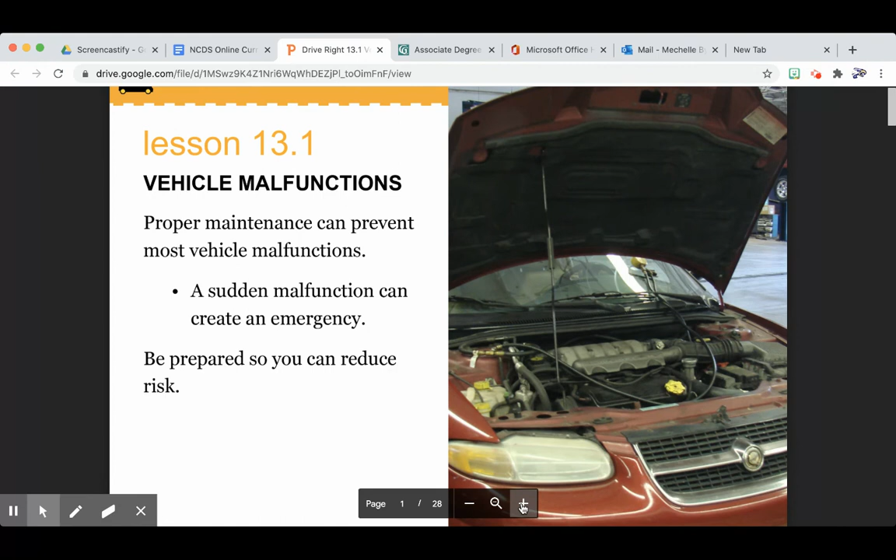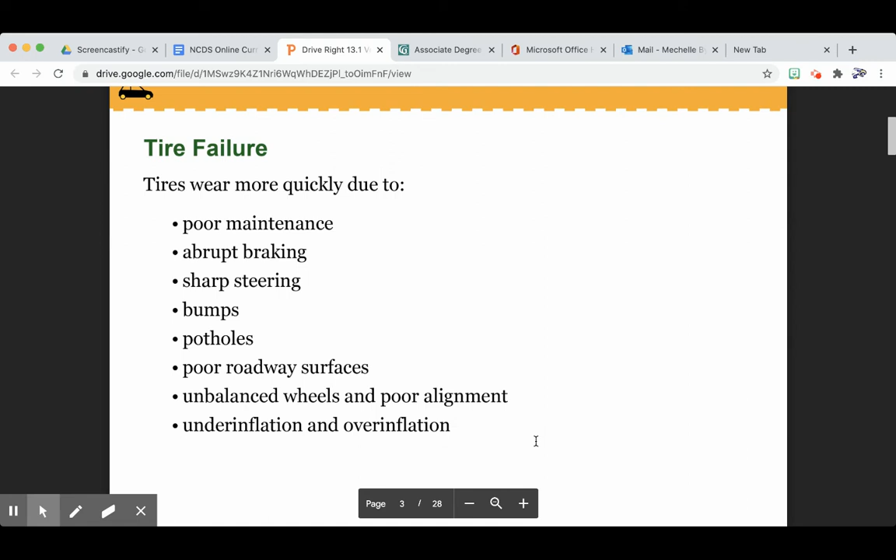List actions to take if a tire fails. Tire failure: tires wear more quickly due to poor maintenance, abrupt braking, sharp steering, bumps, potholes, poor roadway surfaces, unbalanced wheels and poor alignment, underinflation, and overinflation.

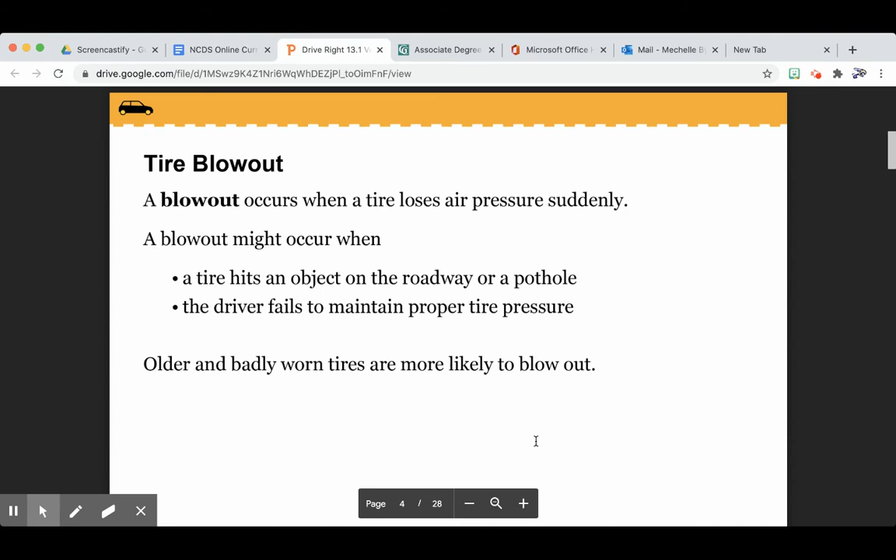A tire blowout occurs when a tire loses air pressure suddenly. A blowout might occur when a tire hits an object on the roadway or a pothole, or the driver fails to maintain proper tire pressure. Older and badly worn tires are more likely to blow out.

When a front tire blows out, the vehicle quickly pulls in the direction of the deflated tire. Steer toward the target and hold firmly against the pull of the vehicle. A left front tire blowout is especially dangerous since the vehicle may pull towards the lane of oncoming traffic. What actions would you take to avoid a car with a blowout that was moving into your path of travel?

Handle a rear tire blowout just as you would a skid. Grip the steering wheel firmly, ease up on the accelerator to slow, do not brake, check the traffic situation as you gain control of the car, drive off the roadway slowly to a safe location to stop, braking gently.

Turn on hazard flashers. Your first instinct is to pop on that brake, mash on that brake as hard as you can, and to overcorrect. You got to remember, try not to do that.

The most dangerous aspect of changing a flat tire is finding a safe place to change it. It is important to know how to change a tire. Where can you find information on how to change a tire on your vehicle?

Replace or repair the flat tire as soon as possible. If your spare tire is a temporary or compact spare, drive on it only as necessary under the manufacturer's conditions for use. Many spare tires are called 50-50 tires, meaning the vehicle should not be driven over 50 miles per hour or more than 50 miles.

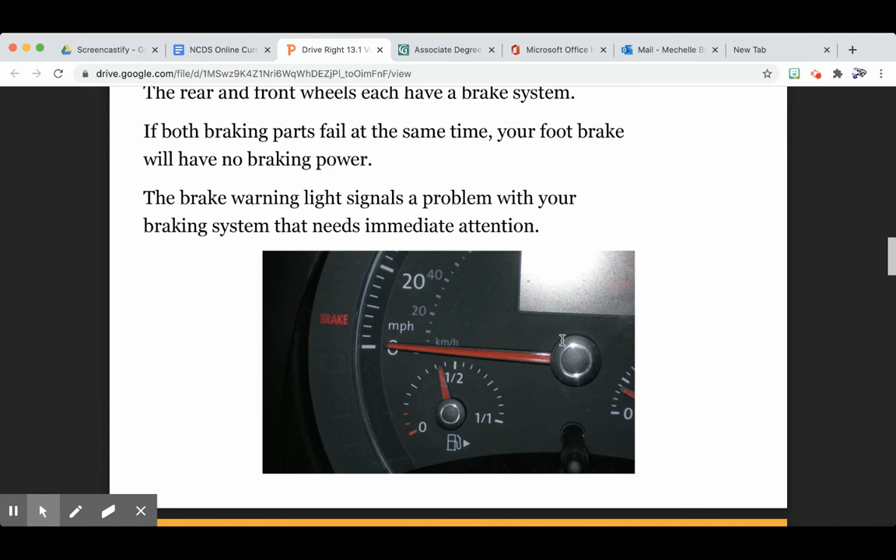The brake warning light signals a problem with your braking system that needs immediate attention. Total brake failure rarely happens, but if it does, it is important that you stay calm.

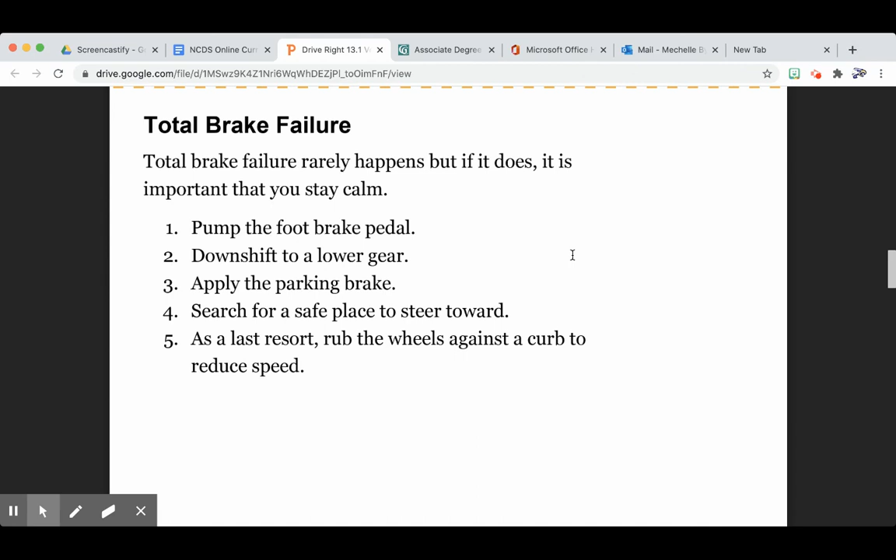Pump the foot brake pedal. Downshift to a lower gear. Apply the parking brake. Search for a safe place to steer toward. And as a last resort, rub the wheels against a curb to reduce speed.

When brakes overheat, they can lose effectiveness. This condition, called brake fade, occurs after continuous hard braking. To regain full braking ability, stop the vehicle and let the brakes cool.

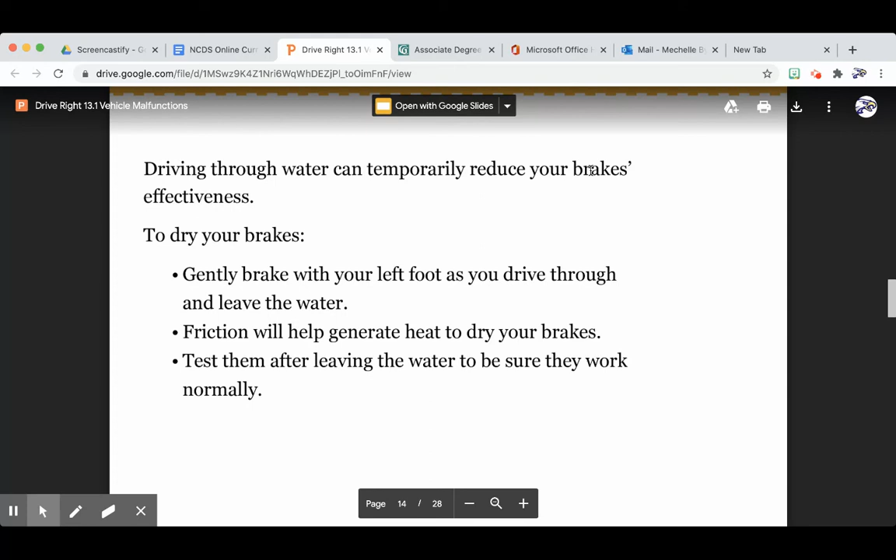Driving through water can temporarily reduce your brakes' effectiveness. To dry your brakes, gently brake with your left foot as you drive through and leave the water. Friction will help generate heat to dry your brakes. Test them after leaving the water to make sure they work normally.

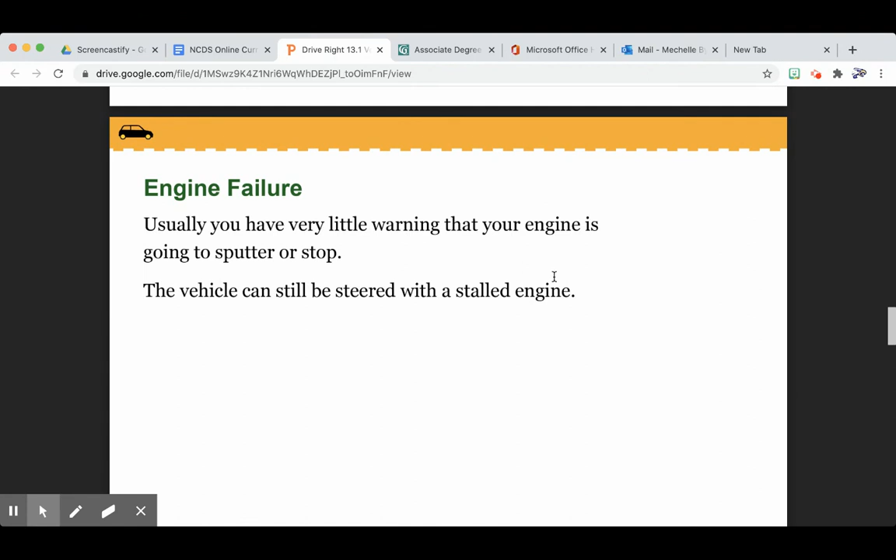Describe what to do in case of engine or steering failure. Usually you have very little warning that your engine is going to sputter or stop. The vehicle can still be steered with a stalled engine.

If your engine stops suddenly, shift to neutral when the engine first sputters or stops. Begin moving out of traffic with your flashers on. Do not brake. Try to restart the engine while you're moving. If the engine starts, shift into a forward gear and proceed to safety.

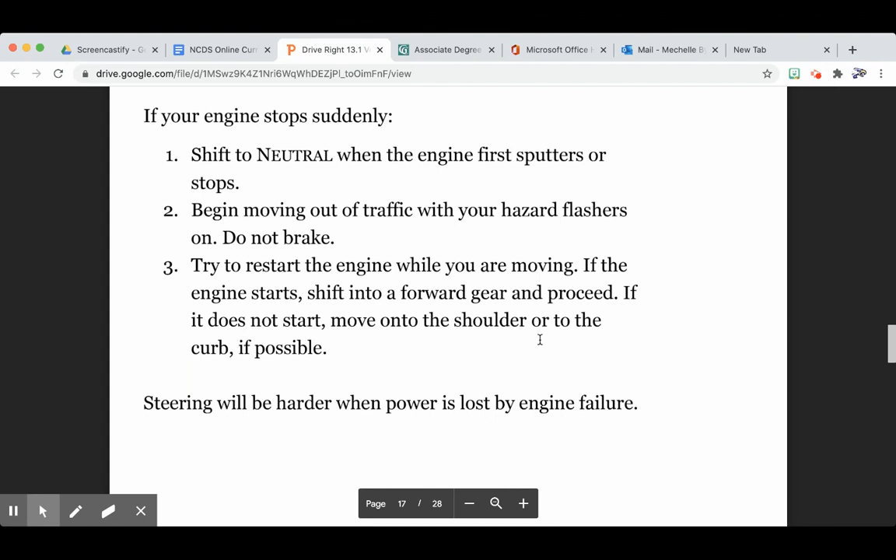If it does not start, move onto the shoulder or the curb if possible. Steering will be harder when power is lost by engine failure. If your engine fails, turn on the hazard flashers, move safely off the roadway, and raise the hood. If you have a cell phone, call for help. Be sure to stay away from any traffic.